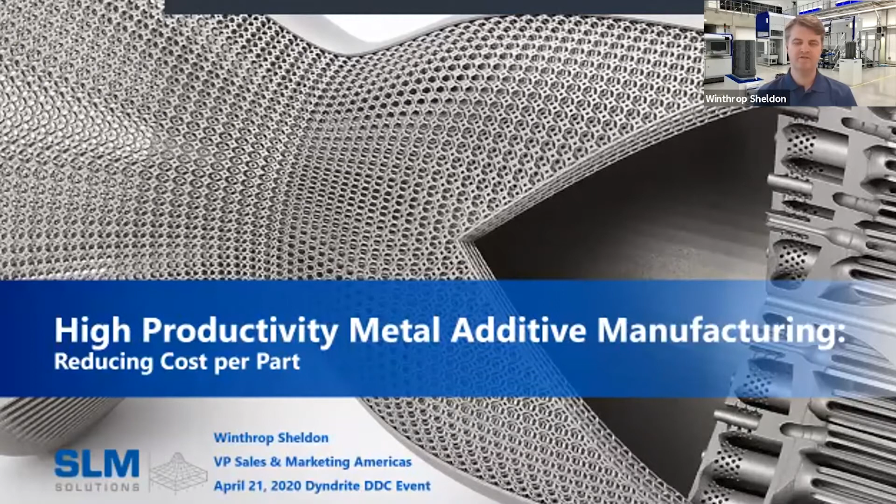And I'm going to be talking to you today about one of our key value propositions, which is high productivity metal additive manufacturing. I'm going to start with a commercial on our company.

What makes humans so special? What makes us special is our tools. They gave us more strength, more possibilities, and the knowledge to make even more advanced tools. The next tool helps us build the future. Impossible designs, unimaginable constructions, functional masterpieces of metal. A tool that doesn't just build products, but reimagines what is possible. We invented that tool, doubled its power, and doubled it again. And we're not stopping there. For our customers, for the future, for whatever we think of next. SLM Solutions.

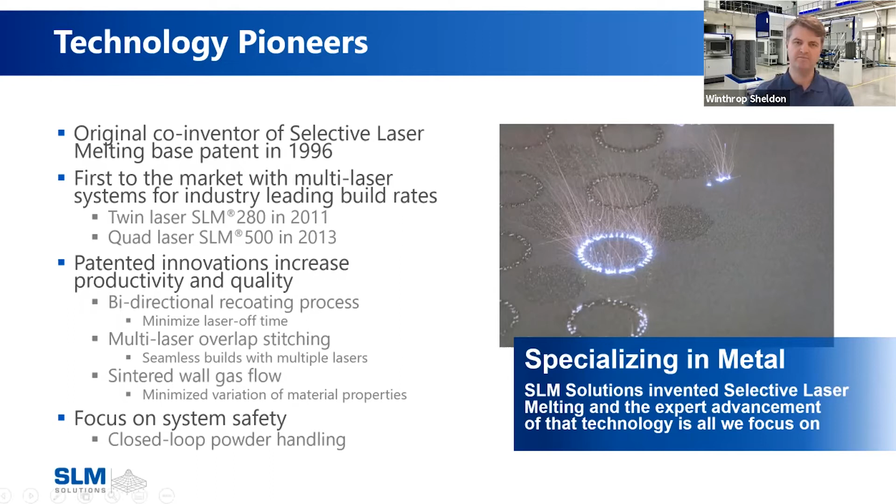So just briefly, our product portfolio is focused on the actual machines themselves. So we offer 4 machines today on our lineup that are able to be configured in many different ways. We offer a 5-inch printer, the SLM 125. We offer an 11-inch printer, which is the SLM 280. It's our biggest seller, our mid-size printer.

We offer the SLM 500, which is a 20-inch, usually a 4-laser printer. This is a production class printer. And then we also offer the SLM 800, which is an extended Z-height version of the SLM 500 that also has automated powder unpacking capability as well, that we're starting to ship in the US market. Again, more of a production-oriented printer.

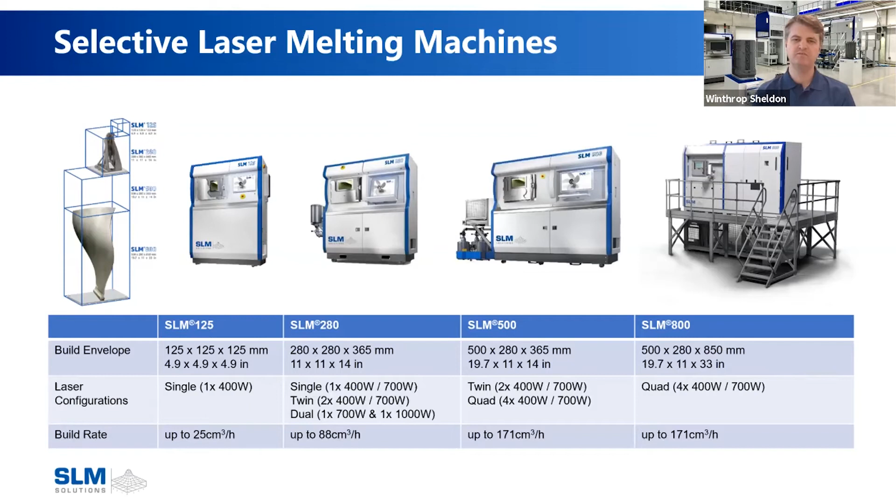One of the unique elements of our printers is that the same optics are available across all the machines. So you can have a 400-watt laser or a 700-watt laser in all sizes of the machine, which enables unique material development and ease of moving material developed on one machine to another in terms of the unique parameters that you would develop. This has helped a lot of our customers develop parameters on smaller format machines and move them forward to our larger production systems.

So specifically in this talk, we wanted to focus on high productivity. I think Dyndrite's bringing a lot of technology to the market that's enabling higher productivity and more complexity of geometries, as well as many other benefits to the digital workflow related to additive manufacturing. We focus right now on really the hardware elements and the more finite hardware related productivity drivers.

So the first one we'll highlight here is laser power. So one of the unique elements of SLM is that we do offer 400-watt and 700-watt laser options on our machines. These are available with the same spot size for the laser. So it's a Gaussian profile, single mode laser. This is unique in that you're able to get much higher power with the 700-watt laser, but not give up the resolution from the fine spot size of the beam.

So this slide is talking about the productivity difference in build rate between 400-watt and 700-watt lasers with a fairly generic type of geometry. These look a little pink on my screen on the green substrate plate of the printer. And this is in the development space in a Magics environment. But these cylinders, again, you wouldn't say they're optimized by any stretch of the imagination for additive,

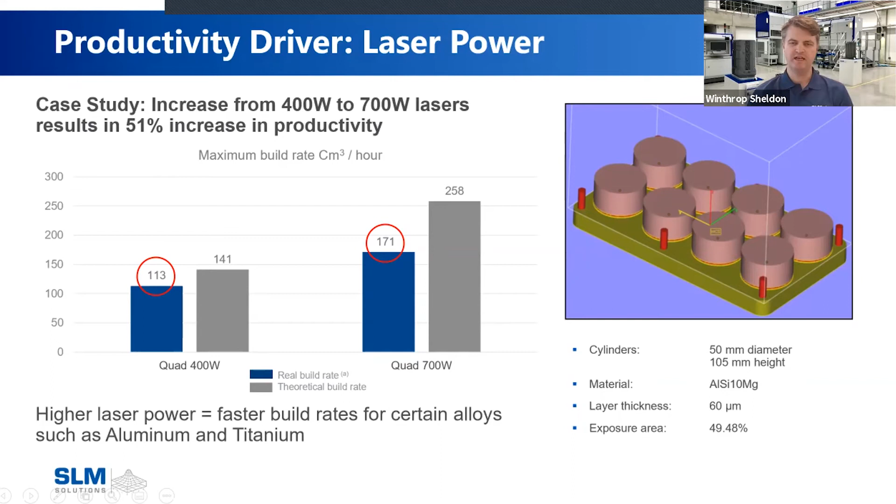but simply highlighting here a dramatic difference in build rate with the quad laser 400-watt machine, 113 cubic centimeters an hour versus 171 cubic centimeters an hour on a quad 700-watt machine. Again, in aluminum, very fast material to build with, and highlighting the impressive increase in productivity when you increase the laser power. We've been shipping 700-watt laser machines for about 3 years now, so it's a relatively new area of our machines, but it's well tested and well accepted in the industry.

Now, the next area that we look at with productivity is the layer thickness that you're effectively able to melt, which enables you to basically proceed through the height of the build faster. Obviously, if you can complete the build faster, you're printing it in less time. So this is a table outlining the layer thickness and the laser power across various parameter sets.

So we start on the left side of this table with a 30 micron layer parameter set at 400 watts, and we progress to the right with our highest productivity parameter set, which is the 90 micron layer using our 700 watt lasers. Obviously, you can see the dramatic increase in the build rate resulting from the use of the 700 watt lasers and the 90 micron layers.

I love the image on the right. So this is basically an experiment showing the same geometry being printed, and the printer running for the same amount of time. So you see here 2 components that were printed for 52 hours, but using different parameter sets. So 60 micron layers at 400 watts on the left, and then 90 micron layers at 700 watts on the right.

Obviously, the part on the right completed in the 52 hours, whereas the part on the left got a little bit more than halfway complete. Just expressing very dramatically the difference in productivity that you gain in the same period of time, printing faster.

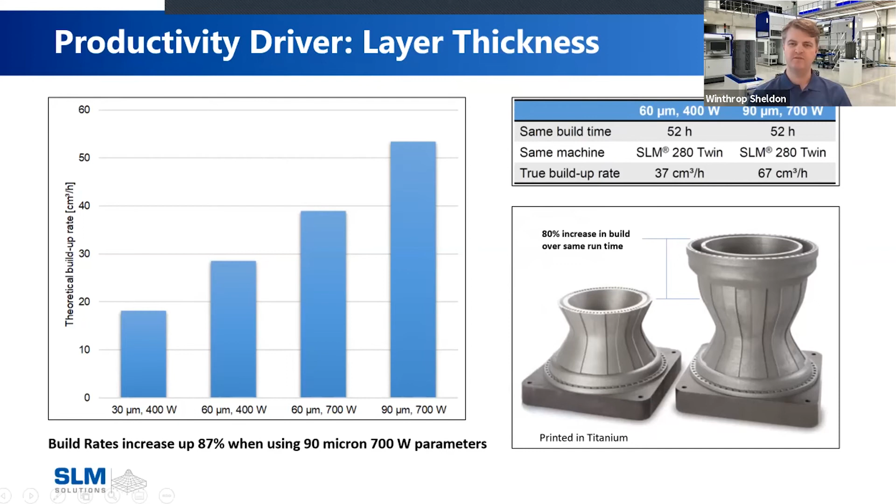And so it's a shame, but at some of the trade shows that were canceled in our industry, so AMUG and Rapid, as well as Aerodef and many others, we would be displaying a full set of these parts that very tangibly paint this picture of the productivity from these different variables that you can have in the machine.

And then we move to number of lasers. So more of a hardware related configuration that you can choose with a machine. And typically what we find in the industry is that the benefits that you get far outweigh the incremental cost to add lasers in terms of productivity. So when you add a second laser to a machine, it's almost like getting the productivity of a second machine next to the first machine if you're looking at single laser machines. Obviously, from a facility perspective, it's very advantageous to have just a single machine running at twice the speed.

So here's a basic layout of turbine blades. You can see that the single laser SLM 280 machine is going to print about 43 of these components in one build. And the part cost is about $83 out of the build time of 77 hours. You add the second laser, you build the same number of parts because the build plate hasn't changed size, just the optics have doubled. And all of a sudden we go down to 41 hours for that build time, and it drops your price per part down to $53.

So again, very compelling. And then if you move up to a production machine, you can almost double the number of components, not quite double, with 78 per build. And your build time is very similar because you're simply doubling the number of optics and doubling the number of parts, very nearly. But you do have a resultant small savings per part.

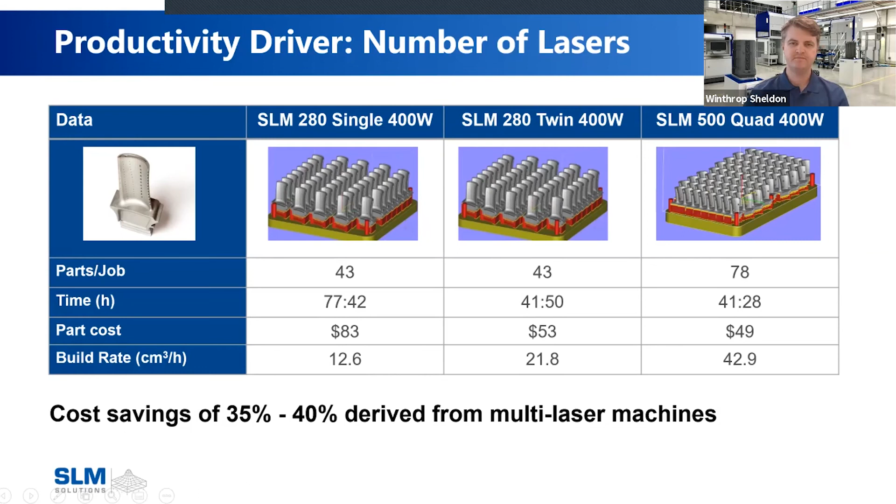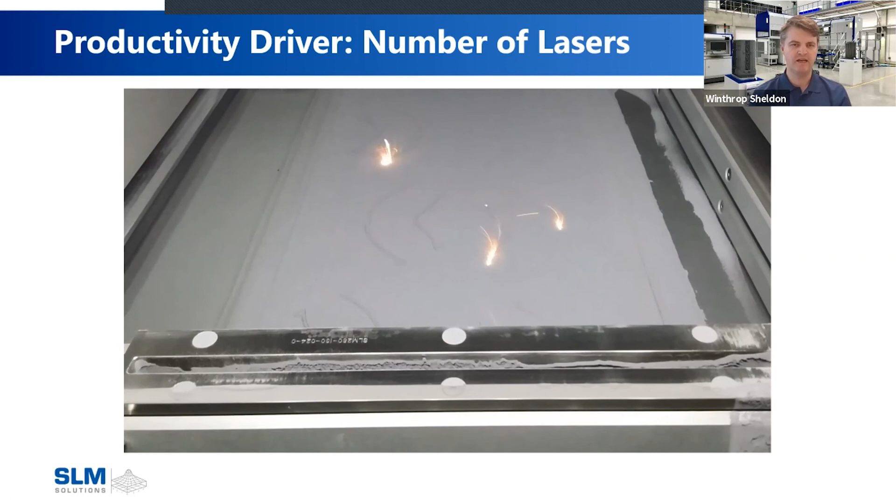Okay. So I just wanted to show a live SLM 500 machine with 4 lasers operating. Many folks in the audience are probably familiar with what the process looks like, but I'm always surprised that many people haven't actually seen one of these machines run. So we'll just look at 2 passes of the 4 lasers on the powder bed. That device you see moving is the bidirectional recoater. And now you'll see the lasers fire again for another full layer.

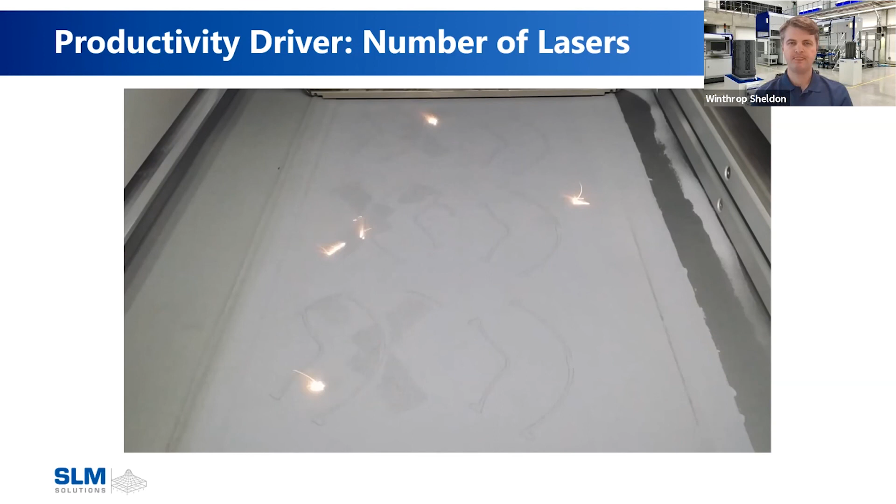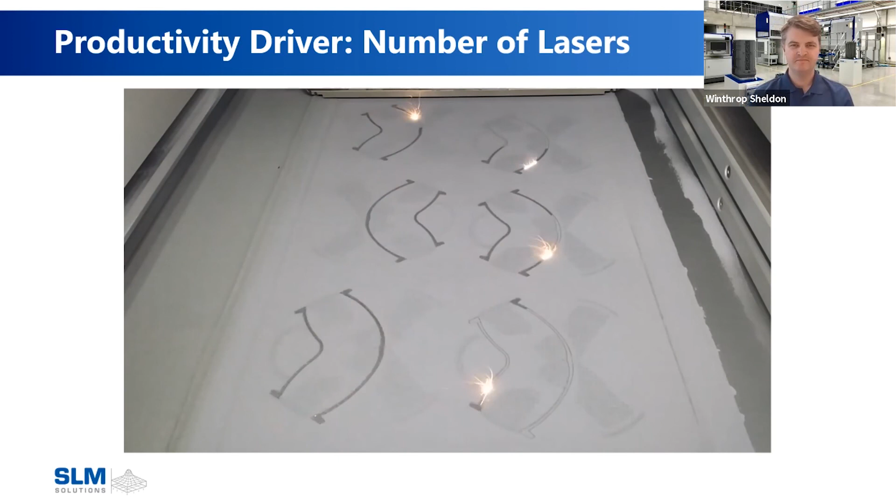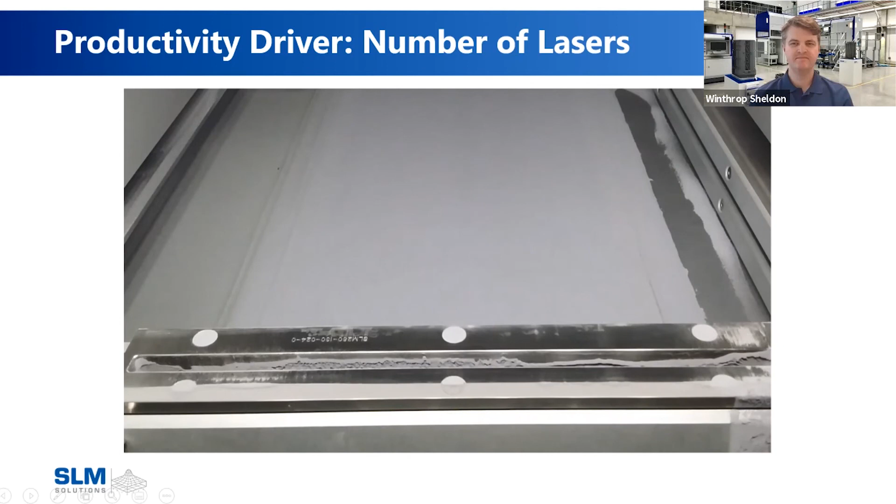That's slick. All right. Looks like we've got a question from Mike Geyer. Mike, I just unmuted you so you can talk. Oh, Mike? Yep, I didn't actually have a question. I'm sorry, I'm not sure how that happened. Oh, no worries. All right. Let's get one from Fabio.

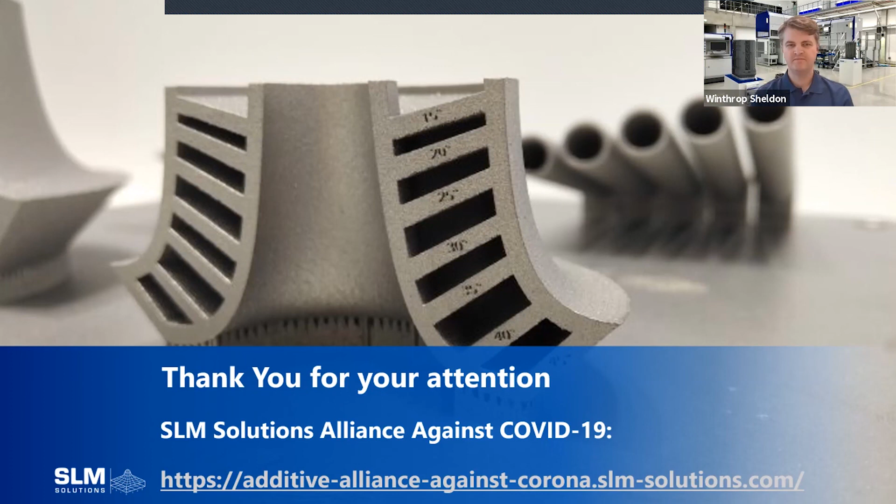Is there a difference on the raw material for use of higher energy to melt the powder? No, it's the same feedstock powder specification for any of the parameters or any of the laser powers that I've discussed.

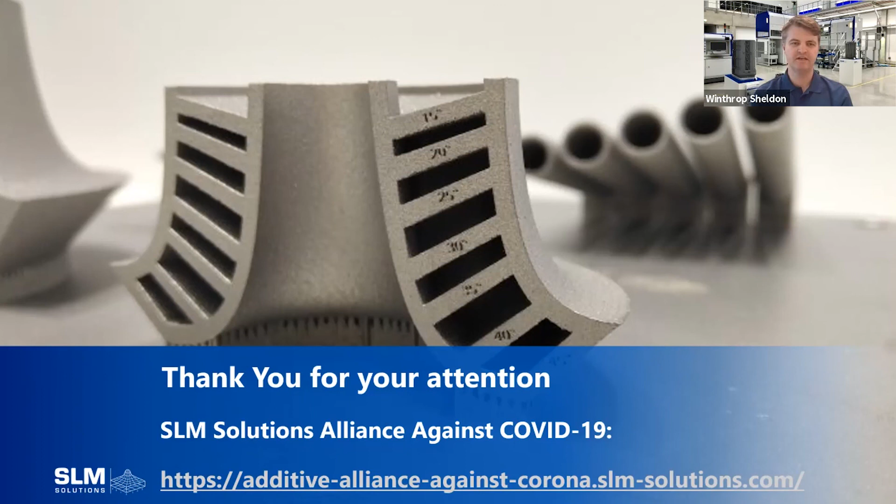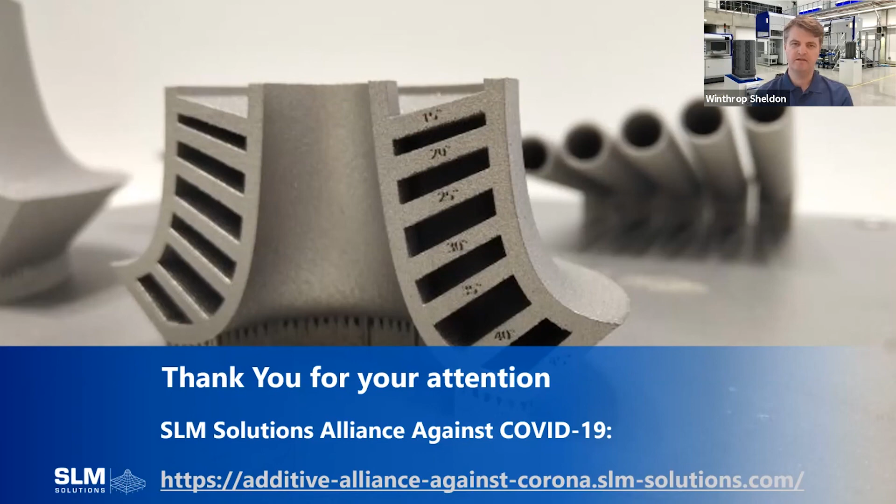All right. Then does the higher cost of multiple laser systems offset the part cost benefit considering the high initial investment? Yes, in my experience, absolutely. I think the bigger barrier is to make sure you have enough capital in your budget to be able to make the initial expenditure, but the productivity gain is so strong that as long as you can get into a multi-laser system, your productivity on an annual basis will be so much higher that it's usually a very easy business case to make.